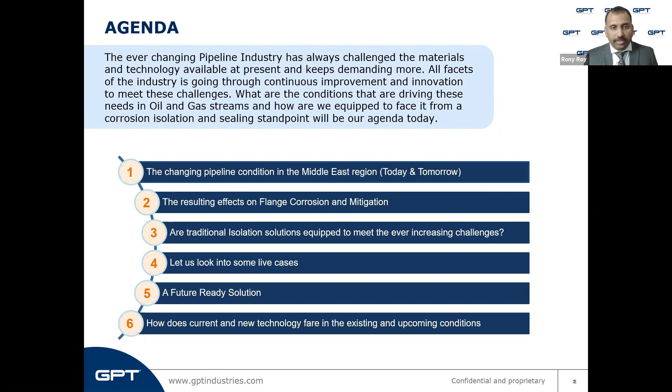Today we are standing at the threshold of a significant energy revolution that is going to change the way we live, travel, conduct business, and manufacture.

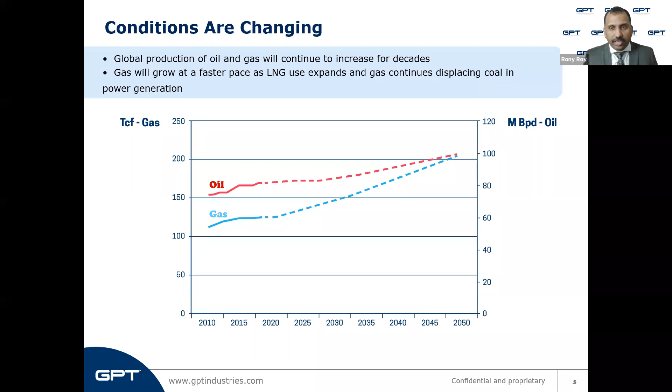Yet we know that man's dependence on hydrocarbons is not going away anywhere soon. In fact, peak oil is still a couple of decades away, and gas continues to dominate the market as it backs up renewables and provides cleaner energy. Population growth is also driving that demand, and producers are going to have to operate differently to meet it. The easy to extract fields are getting depleted. As an attempt to make supplies meet demands, newer techniques and technologies are required.

Now the conditions are changing because the scenario is becoming more and more demanding for the oil and gas or hydrocarbon industry to rejuvenate old wells and to go deeper than ever before to obtain the oil and gas.

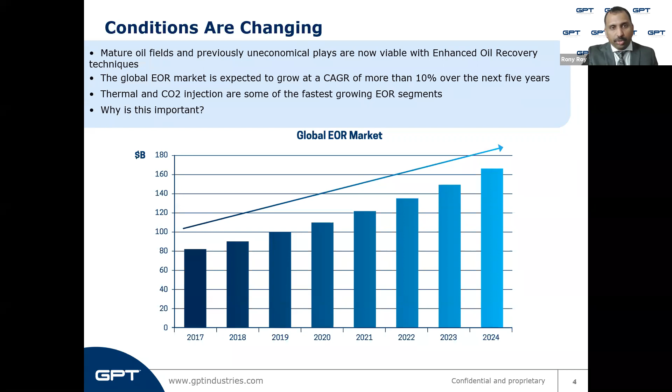Enhanced oil recovery methods have to be put in place now using steam, nitrogen, natural gas, carbon dioxide, thermal injection, and these are all on the rise and will continue for the next couple of decades. This exposes products in the pipeline to temperatures, pressures, and mediums that it has never seen before, and that too in large quantities. High pressure and high temperature wells, and ultra high pressure and high temperature requirements, are on the rise. Suitable materials that can withstand very high temperatures and pressures are required for each and every component in a pipeline.

Further, the conditions are changing in terms of the sour content in the wells. The easily recoverable and sweeter resource wells are getting depleted quickly. The newer enhanced recovery methods and knowledge in exotic metallurgy has helped drill deeper and extract from wells with more sour content. H2S, or hydrogen sulfide, from these sour wells affects detrimentally all the components used in these operations. In pipelines, hydrogen sulfide is a primary contributor to a substance called iron sulfide, which you see as black sedimentary buildup inside the pipelines when you open it up after certain years for maintenance. This buildup is intrusive in nature, and it disturbs the flow of media and even facilitates corrosion.

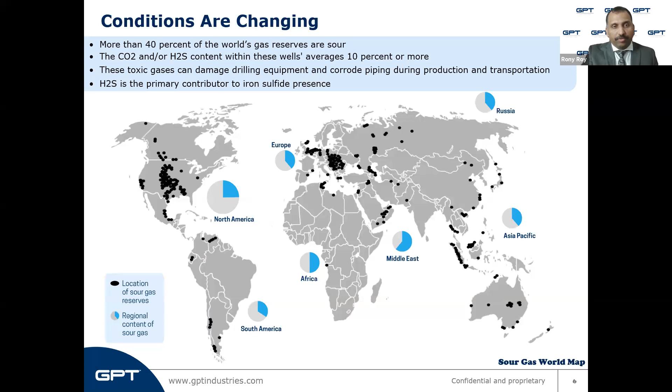Even greenhouse effect reduction requirements are in place, with government entities taking a much more proactive role to bring emissions down. Talking about onshore and offshore refineries, distribution lines in the upstream, midstream, and downstream processes of the hydrocarbon industry, every sector is aiming to reduce the carbon footprint and emissions.

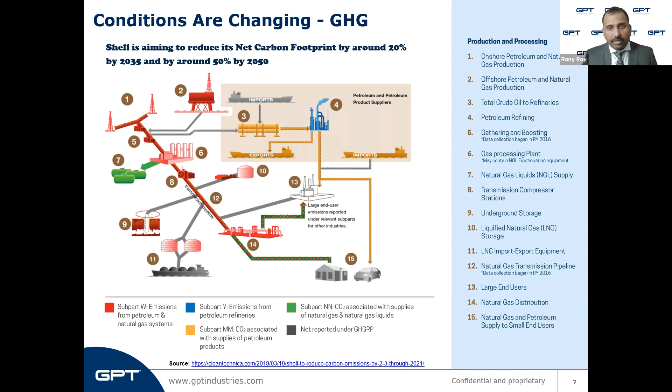Shell is aiming to reduce its carbon footprint by 20% by 2035, that's 15 years down the lane, where everyone is concerned about reducing emissions. Even here in the Middle East, local players and end users are adopting serious measures to reduce their carbon footprint and be less taxing on the environment, which is good news for everyone, and manufacturers like us are also required to be aligned with it for a joint effort toward a good cause.

ADNOC recently mentioned that it aims to reduce its carbon footprint by 10% by 2023 and 25% by 2030. To achieve this, ADNOC is constructing new carbon capture, utilization, and storage facilities alongside the existing Al Reyadah one.

Saudi Arabia's state oil giant, Saudi Aramco, has agreed to reduce the carbon intensity of its business as part of the Oil and Gas Climate Initiative, which includes Shell, BP, and ExxonMobil as an industry-funded alliance. They have pledged to reduce the carbon intensity of their fossil fuel production to between 20 and 21 kilograms of carbon dioxide per barrel of crude by 2025.

To meet these stringent emission norms and targets, the sealing needs to be tighter, with little to no chance for permeation.

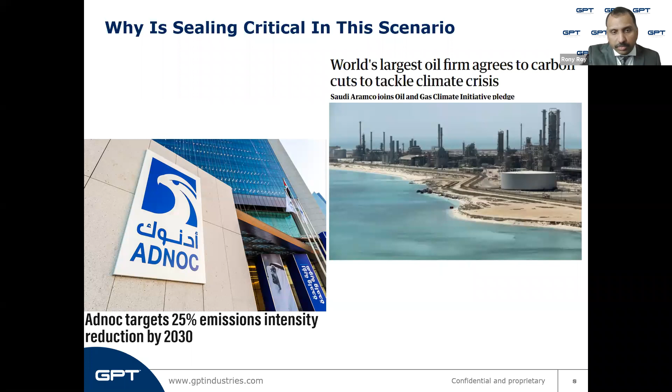So how do these conditions influence sealing? Such changing conditions require a significant improvement in flange joint sealing, and it is the need of the hour, as only a correct seal or gasket can keep the stuff that should remain within the pipeline within the system. The ideal seal should be able to remove the chances of contaminating the surrounding environment with a tighter seal.

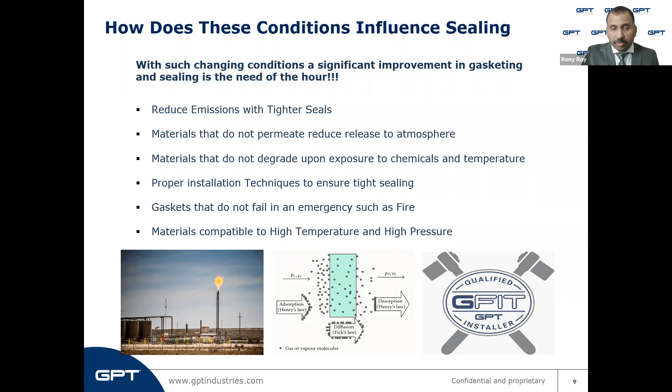The materials themselves being more compliant to the conditions will help reduce toxic emissions and improve performance. A proactive method of preventing seal failure by increasing the skills of personnel through training, and doing the installation correctly in the first place, is also required. Better and safer seal design can eliminate risk during emergencies such as fire. All these factors are contributing to the requirement of bringing down emissions and making seals more effective in the future.

With all this insight in developing the ultimate seal for the future, we will see how seals and different conditions such as environmental and metallurgical factors can affect the flanges where they need to seal.

Flange face corrosion is a subject in its own right, as many companies have invested millions of dollars to ensure the flange joint conditions perform well to meet production consistency and quality, along with increasing its life and reliability over the years. Corrosion preventive measures such as regular maintenance, using flange isolation kits, and using flange joint covering bands are some of the methods adopted for achieving corrosion protection against flange joints.

Today we'll look into how flange isolation kits contribute to this requirement.

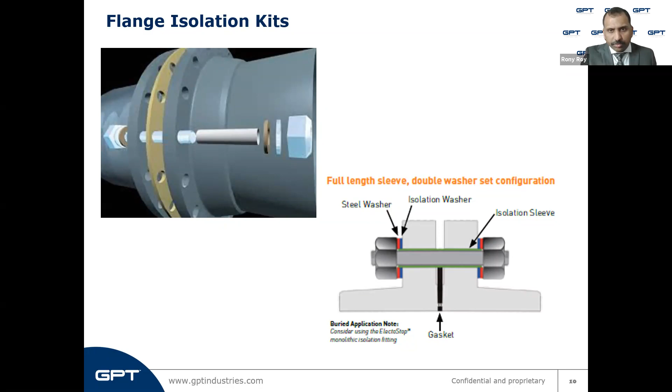The first and foremost is galvanic corrosion. When 2 dissimilar metals of different electrical potential are coupled with each other by a metallic path, and in the presence of an electrolytic or conductive media, it will lead to galvanic corrosion.

Flange isolation kits remove the metal contact between such flanges at the flange faces with an isolation gasket, at the studs with an isolating sleeve, and at the nuts with isolating washers, as you saw in the previous slide. By isolating the metal-to-metal contact, flange isolation kits eliminate any chance of galvanic corrosion, preventing flange reduction or material reduction in the flange joints.

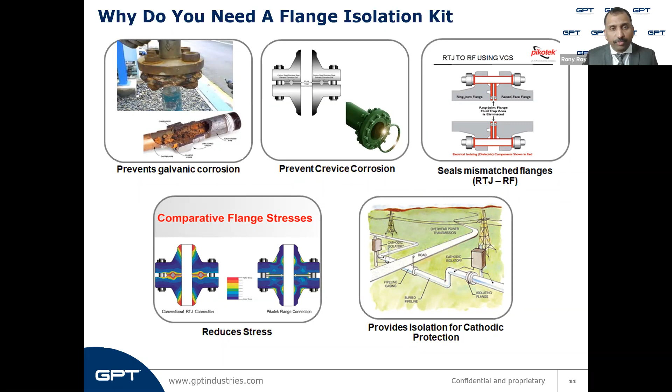And the final one is isolation joints being used in CP systems, or cathodic protection systems. This enables isolation between sections that are CP protected and unprotected. It also helps increase the cathodic protection efficiency by eliminating the risk of stray currents and surrounding electrical influence. Also, it is used in long pipelines at sections of above ground and underground transfer points.

So we have seen what a flange isolation gasket kit does. Now, where do we stand in terms of this industry? Let us see where the current technology stands and why innovation is long overdue in this field.

In the beginning of the last century, phenolics was the material of choice, which was then taken over by fiberglass or glass reinforced epoxy that came into the scenario through development in material science in 1942.

Over the years, since its introduction in the isolation industry, the glass reinforced epoxy, or gaskets made from glass reinforced epoxy, has seen various improvements and incremental development to compensate for its shortcomings and the heavier demands of the hydrocarbon industry.

Various improvements in the design of the isolation gasket made by GRE were ushered in to make it withstand high pressure, provide fire safety, and make it more chemically compatible.

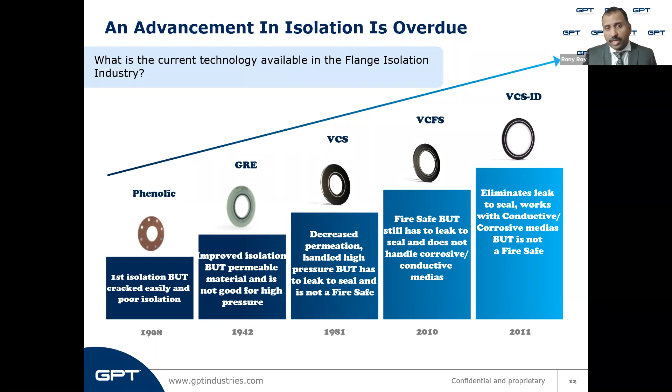Yet we see a common theme here. The glass reinforced epoxy has its own demerits, and gaskets laminated with them have isolated flanges but have struggled to keep up in other areas. Permeation, susceptibility to melting in a fire, chemical incompatibility - all these issues have plagued the plastic laminate, or the glass reinforced epoxy laminate, that goes on top of isolation gaskets.

Now, what is the challenge with the current technology? We have seen designs where the isolation gasket is made from a stainless steel or metal core, which is laminated by GRE, or glass reinforced epoxy, on both sides of the gasket.

As a global manufacturer, GPT always interacts with corrosion engineers, integrity engineers, reliability engineers, and material engineers at our end user companies throughout the world. And we perform voice of the customer interviews regularly. In such discussions, we come to know the trending changes and new needs of the industry, and we design our products accordingly.

Now, the VCS gasket has got a 316L SS core metal, and it has got glass reinforced epoxy laminates as part of the retainers, laminated on top of it and on both sides. And it has got a groove where a Teflon seal gasket, which is pressure energized or spring energized, is laid inboard.

Now, when pressure is introduced into the media in the line, the media can permeate through the GRE material, the glass reinforced epoxy material, and can reach the Teflon seals. The Teflon seals are designed in such a way that they compensate for this shortcoming, and they positively get energized, further pressing against the flange face and providing a positive sealing effect.

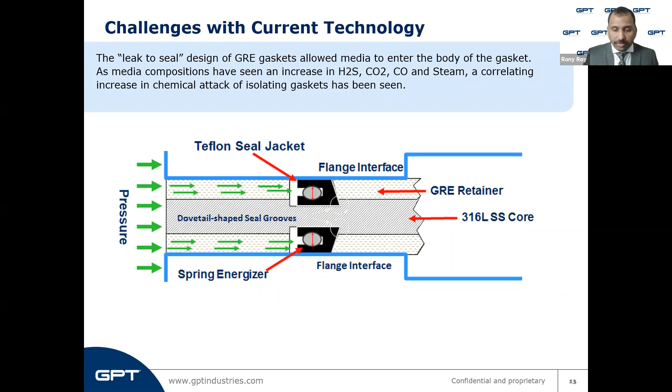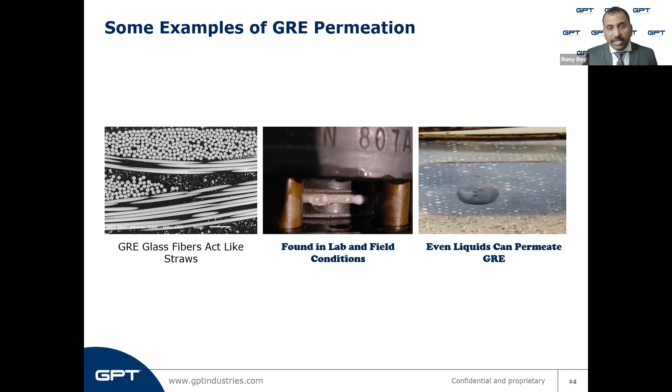And you can see another picture on the right hand side - it is a gasket that was taken out of operation after 15 years in a highly viscous hydrocarbon line, and yet you can see the hydrocarbon or media had permeated through the GRE body itself.

N-butane was the most prevalent chemical in the pipeline makeup. The thermoset glass reinforced epoxy receives a not-rated certificate for this chemical at 234°F. Greater than 20% swelling will occur with a greater than 50% loss in tensile strength. This confirms why the G11 delaminated.

G11 is a type of GRE grade used for manufacturing these gaskets. You can see the glass reinforced epoxy G11 had delaminated from the stainless steel core, which led to the blowout of this gasket.

A chemical treatment was also added to the media stream on occasions, and this treatment contained ethyl benzene, which has a non-rated rating at 70°F with the epoxy. Upon evaluation, we could see that much of the gasket was simply glass fiber with no epoxy left in the matrix.

As this happened with the media in the line, it started to migrate and permeate through the gasket material made of GRE. Once the epoxy was gone, the gasket lost its strength, and the 1636 psi line pressure pushed the seal into the weakened glass structure and created a blowout.

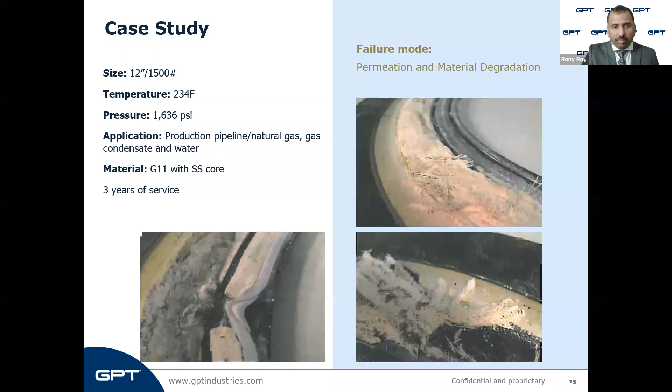Another scenario in the conditions that are changing in modern times is the high pressure and high temperature requirements. Conditions are demanded for higher steam applications, and temperature has increased a lot over the years. The temperature requirements for well conditions are much higher than they were in the past. So GRE does not have the high temperature capability, and homogeneous GRE does not have high pressure capability.

Metal cored GRE should not be used in applications that are over API 10K, and fire safe glass reinforced epoxy, or GRE, should not be used in applications over API 5K.

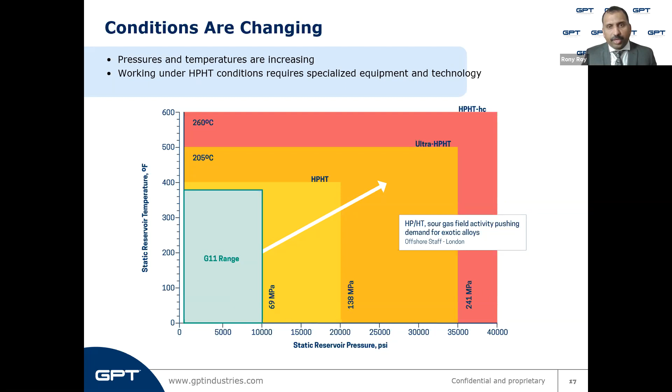As we just saw, G10 covers very little of the potential temperatures and pressures that can be seen in today's pipelines. G11, another grade of GRE, has a better temperature rating, with a temperature limit of 200°C, but it still covers only a small portion of this graph.

Moving on, we can see a case study of how GRE gaskets fail in high temperatures. This is a live example to emphasize the risk of plastics being exposed to temperatures that they will not be comfortable with.

This was a gas application at a Christmas tree. It was high pressure at 7,000 psi at over 330 degrees Fahrenheit. The gaskets were G10 with a stainless steel core. These gaskets were exposed to temperatures exceeding the rated value of G10 material.

The G10 glass reinforced epoxy near the bore on both sides of the gasket was very dry and brittle, consistent with the epoxy binder being driven out of the glass fabric by the high pressure. This leaves the G10 very weak and brittle and can allow the seals to creep, especially at these temperatures and pressures.

The drying of the glass mesh, that is the absence of epoxy, became much less severe away from the bore. That tells us the inner portions of the gasket experienced higher temperatures than the outer portions. The upper limit of G10 is 302 degrees Fahrenheit, or 150 degrees Celsius, so this was not the correct choice for this application, eventually leading to a blowout.

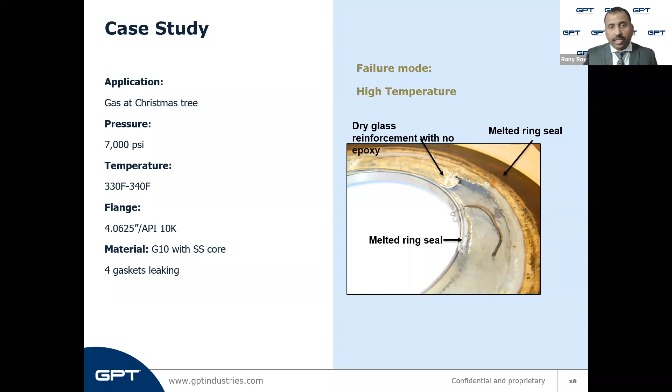Another application where GRE has a shortcoming is when it is introduced to steam. This was an actual gasket which was put into service and taken out of service after 34 weeks. This speaks volumes about the incompatibility of GRE in steam applications.

Water combined with CO2 will produce carbonic acid, and the epoxy in the GRE is incompatible with carbonic acid. But the carbonic acid wasn't actually the issue - GRE is simply not compatible with steam.

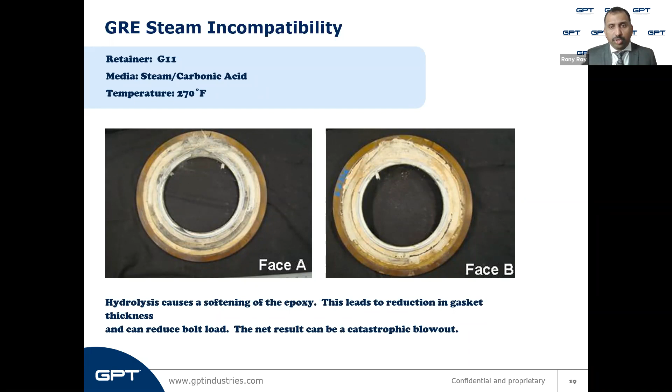This can be seen from the two images. G11 is rated at 200 degrees Celsius, so the 270 degrees Fahrenheit should not have been a factor, but the softening of the gasket due to the steam introduction and the volume loss led to a blowout, which is a real danger.

A case study to prove this point is here. At GPT, we are lucky because we have a fairly large engineering staff who are able to review these failed isolation products and create a forensic report about it.

We are also fortunate that we are part of the Garlock family of companies, and Garlock has a tremendous number of analytics equipment in multiple laboratories. We are able to ascertain material component makeups, thermal degradation values, maximum temperature exposure, chemical attack, tensile values, change in tensile values, and many other things that we can evaluate in our laboratories.

We even have a functional test laboratory that can replicate field conditions to make sure that our gaskets or seals are going to work in the conditions that are out there. In this case, we have a 16-inch 600 class glass reinforced epoxy metal coat isolation gasket, like the VCS that we had discussed before.

The pressure was approximately 1440 psi and the temperature was 220 degrees Fahrenheit, or 105 degrees Celsius. The media was hydrocarbons with steam, and the application was a slug catcher.

Analysis shows that the epoxy in the glass reinforced epoxy became hydrolyzed by the steam. Hydrolysis, as known from the Greek term, hydro means water and lysis means to unbind. The epoxy chains were broken down under pressure and literally got driven out of the glass matrix. This dramatically reduced the strength of the product and ultimately led to leakage or blowout.

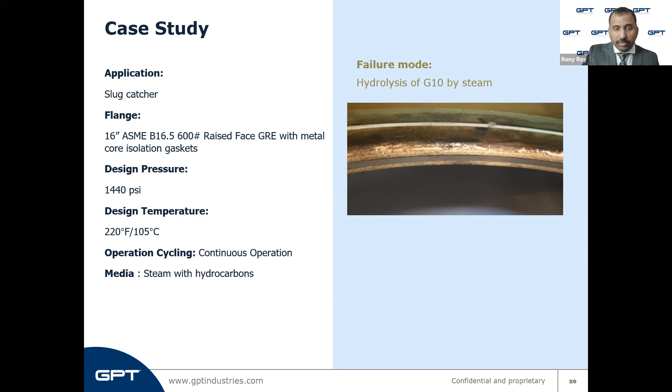Another shortcoming of GRE is its chemical incompatibility when it comes in combination with sour content. If the media entering the gasket is not compatible with the GRE laminates, there can be many types of failure. This is a study of glass reinforced epoxy's incompatibility to the chemicals in the media flowing through the pipeline, which can lead to chemical attack.

In this case, G10 and G11 grade gaskets were exposed to sweet gas and sour gas for a period of 2 weeks. You can see from the bubbles forming on the gasket face that it appeared as though the G10 and G11 were being attacked by the sour gas.

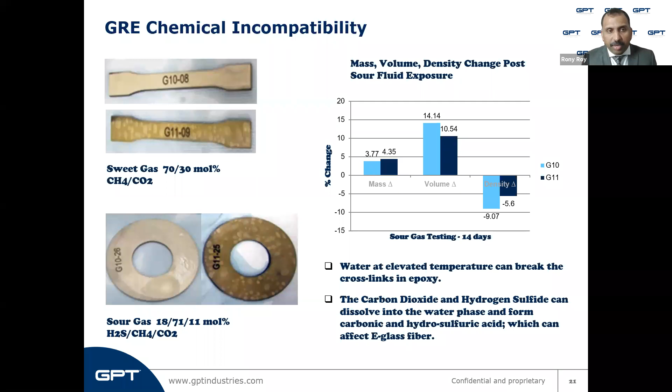We performed mass change, volume change, and density tests on the G10 and G11 samples, and indeed they were both attacked and had significant changes in these three parameters by the sour gas that was introduced into the media while testing.

This is a live case of how GRE will fail under conditions of chemical incompatibility in sour media. The temperature was 124 degrees Celsius, the pressure was 1180 psi, and it was a ring type joint flange. The gaskets here were only in service for 90 days.

To really get a good understanding of exactly what happened to this gasket, let's have a look at a cutaway view of the gasket in the pictures at the bottom. The cause of failure was a combination of attack by sour gas and the effects of steam hydrolysis.

You can see from the images that the inside of the gaskets were devoid of epoxy, extending all the way through approximately 66% of the gasket.

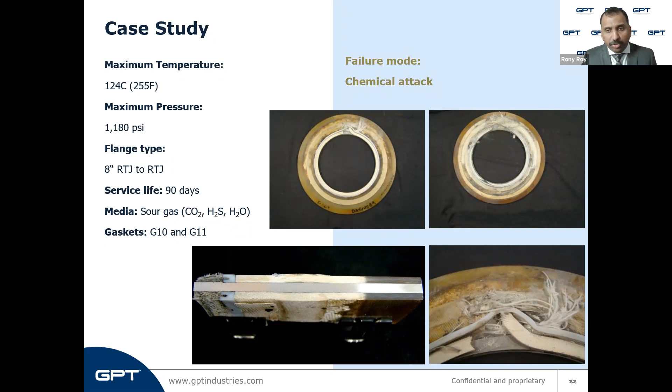The high temperature water broke down the epoxy by breaking the crosslinks, and the hydrogen sulfide, as we know from other sour gas testing, accelerated the breakdown in the epoxy by reducing the gasket's density and increasing the gasket's mass. Additionally, the hydrogen sulfide can dissolve into the water, and the carbon dioxide can as well, creating hydrosulfuric acid and carbonic acid, which can break down the glass fibers. So this domino effect led to a failure in just 3 months.

GRE is not fire safe. You can see how a GRE looks after it is subjected to burning in a fire.

We have equipment to conduct road shows, and we have done some of these road shows at our customers' facilities in Abu Dhabi, Saudi Arabia, and India, in our quest to increase awareness about the lack of fire safety and the issues lines will face if they lack fire safety in non-fire-safe GRE isolation gaskets. Fire tests such as API 6FB, live roadshows, and history all prove this point.

Now, which customer wouldn't want a fire safe product to increase their safety rating and records? Yet most of our sales testify that customers still buy non-fire-safe GRE gaskets, as the fire safe gaskets are very expensive for many.

So when you subject a standard flange isolation gasket kit to fire, it tends to have, as you can see here, some failures.

The gasket itself, with its plastic laminates, fails after a certain degree Celsius. G11 would fail after 200 degrees Celsius, G10 would fail after 150 degrees Celsius, and this leads to a fluid leak path. The other failure components are the isolation sleeve, also made from G10 or G11, and the isolation washers, also made from G10 or G11.

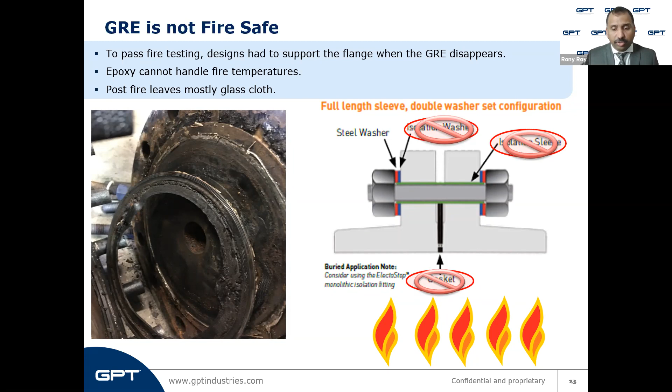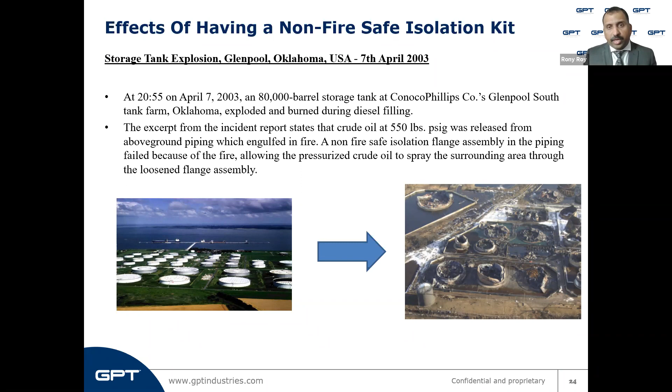One of the examples is the storage tank explosion in Glenpool, Oklahoma, USA, where the incident report stated that crude oil at 550 psi was released from above ground piping, which was engulfed in fire. A non-fire safe isolation flange assembly in the piping failed because of the fire, allowing the pressurized crude oil to spray the surrounding area through the loosened flange assembly. This is an example of how things can severely go wrong and cost millions of dollars, many times higher than the slight premium needed for a fire safe isolation gasket.

Another big challenge with GRE laminated isolation gaskets is their thickness. The metal core GRE isolation gaskets, due to limitations of the then available technology, were made thicker than conventional gaskets. A metal core isolation gasket is 6.6 mm thick compared to 3.25 mm thickness of a regular gasket. This leads to the need for a different approach of installation, and the flanges need to be spread much more than usual.

When we are sometimes told that the gasket was damaged during installation and that the installation was done exactly as the manufacturer recommended, when we ask to have the gaskets returned, we often see large indentations in the metal caused by installers beating the gasket into the flange. Now, that is not a manufacturer recommendation.

So the common 6.6 mm thick isolation gaskets will be a difficulty to install in pipelines that are designed for gaskets that are 3.25 mm thick. Flanges that are not perfectly parallel and are not well aligned will present an even greater issue.

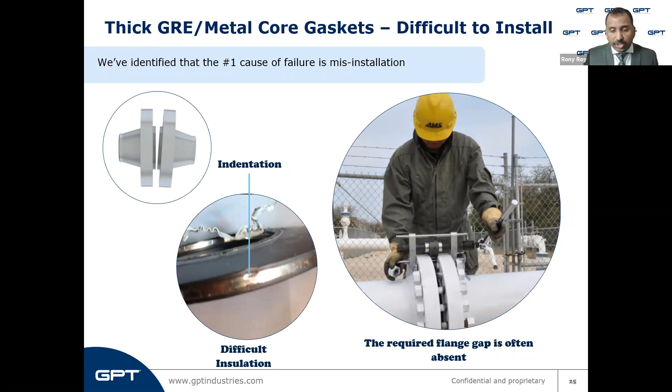A case study about how this can go wrong is here. This is a live example of bad installation. Three isolation gaskets were installed on the upstream side of a venturi meter. Not enough flange gap was created and the isolation gaskets were damaged during installation. Most high pressure isolation gaskets have retainers that are at least 6.6 mm thick. They typically have a seal that protrudes approximately 5 mm more, so a flange gap of at least 9 mm is necessary so as not to damage the seal or gasket.

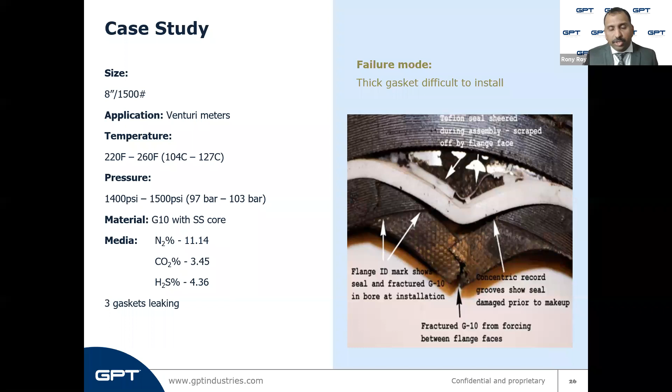Interestingly, with this case, the downstream gaskets appear to have been installed first, and all 3 functioned properly. But when the upstream gaskets were installed, the space was very tight and limited, and that led to the tearing of the GRE as well as the popping out of the PTFE's additional seals.

Now, what could be the ideal isolation product? We sent out invitations to corrosion engineers, integrity engineers, reliability engineers, and material engineers of companies and users around the world and performed voice of the customer research. Based on the feedback we got, we zeroed down to 5 essential points: fire safety at an economical price point, better chemical and thermal properties, thinner gasket for easy installation, high pressure capability, and low emissions. These were the 5 points we kept in mind when developing a gasket that is future ready.

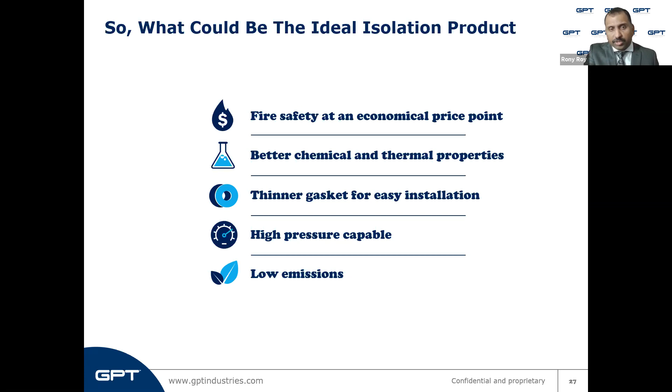This is the new product that GPT has introduced into the market about a year and a half ago, and it is called the Evolution. For the last 80 years, isolation gaskets have been a plastic laminate of some sort. As we have just seen, there are many potential failure modes with these plastic products. GPT has spent over 5 years researching the failure modes of GRE products and now proudly introduces this first isolation gasket that has eliminated any plastic or non-metal on the retainer of an isolation gasket.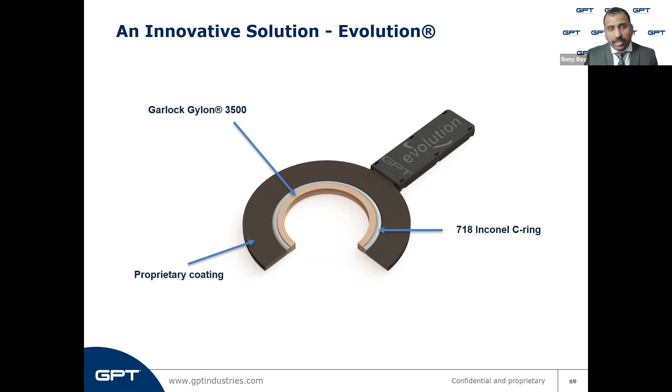Moving on, I was talking about having a tight sealing to make the new sealing options more compliant and better performing for emission requirements, bringing down the leakage rate. Now, this new innovative design has several key attributes, and one of them is that it is extremely tight sealing.

If we look at the sealability of Evolution versus a G10 stainless steel isolating gasket of the previous technology, in an EN 13555 leakage test, Evolution has a leak rate of about 1 times 10 to the negative 8 helium per second. That's about 1 cc of helium leaked over a 3-year period. Whereas the G10 laminated stainless steel isolating gaskets leak about 1 cc of helium every 3 hours. Many conventional gaskets out there, such as the spiral ones, perform much lower than the G10 laminated SS isolating gaskets. You can imagine how much tighter the Evolution is.

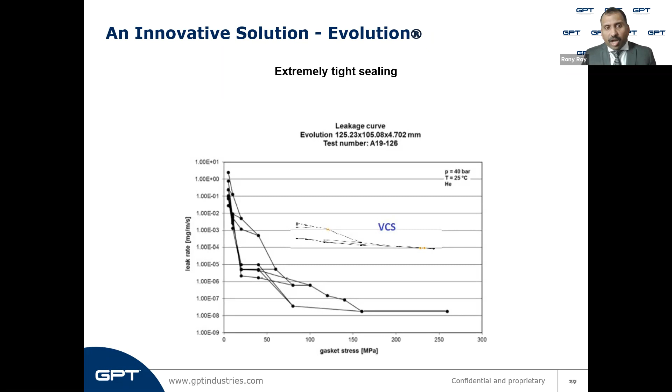The other requirement analyzed during our changing conditions slides was the temperature requirement of the materials. GRE G10 and G11, as we saw, has a temperature rating of 150 degrees Celsius. G10 is 150 degrees Celsius maximum, and G11 is 200 degrees Celsius maximum. Evolution is rated to 500 degrees Fahrenheit, or 260 degrees Celsius, and has shown very little degradation even at temperatures higher than that. The test was run at ambient temperature when you compare these two graphs against a G10 material. G10 becomes a molten mess by the time it reaches the temperature limits of Evolution.

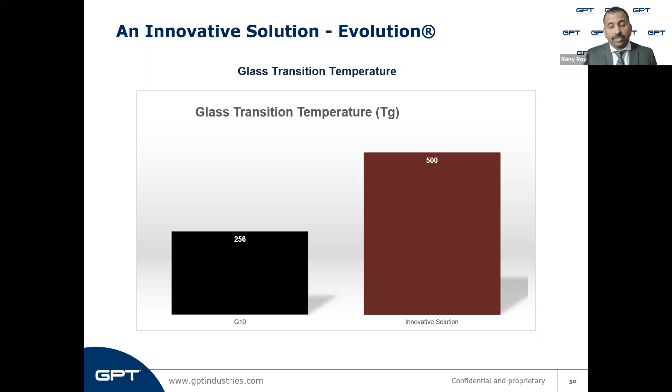You can see the G11 and the G10 compared to Evolution based on the temperature ratings, as well as another important factor, the dielectric factor. Since these are isolation gaskets, the dielectric capacity is important as it prevents galvanic corrosion. Even the dielectric value of Evolution is significantly higher than the homogeneous G10 and G10 with the stainless steel core. The same holds true for G11, which is similar to G10 in its dielectric values, rated at 800 volts per mil.

Evolution, on the other hand, with its new coating, has a minimum dielectric value according to ASTM D149 dielectric testing requirements of 1400 volts per mil, and that is the minimum rating. It has gone up to 1800 volts per mil in some of our tests.

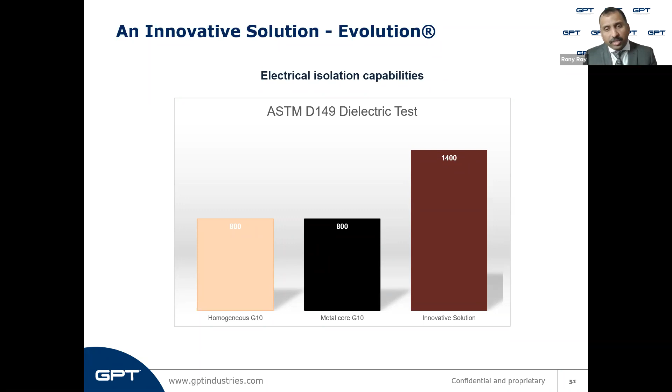The other key factor is that G10 and G11 will absorb moisture during a hydro test because they are permeating in nature, as we have seen in previous slides. This significantly reduces the resistance values after a hydro test. I have seen test results ranging from 3 megaohms to 7 megaohms, and many companies limit the spec value at 10 megaohms minimum. This can be a problem when using a G10 or G11 based gasket after a hydro test. Evolution, since it is a metal coat, a complete metal gasket with no plastic laminates, doesn't permeate, and even after hydro test, the typical dielectric or resistance readings are in the gigaohms range.

Evolution is also much thinner than most high pressure isolating gaskets. The recommended flange gap for a typical flange should be 1.5 times the gasket thickness, which leads to 9 mm spreading of the flanges to make sure you can install a 6.6 mm metal core gasket.

If you are looking at a regular gasket thickness, that is way too high than the normal requirements. Now, as we already mentioned, the Evolution gasket has no plastic retainers on it, so it is much thinner in its construction. It has got a 3.125 mm thickness, which is in line with the industry's regular practices or regular thickness of gaskets, so you don't have to spread the flanges much more than what is generally required.

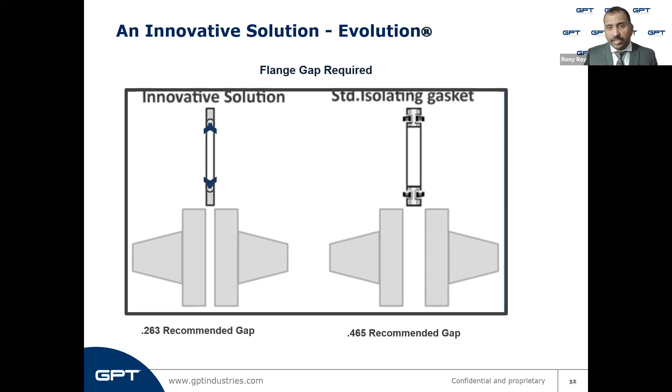We also did sour testing for the new solution along with a new gasket type, along with the G10 and G11 gaskets or materials. When we immersed it in sour gas media, the mass, volume, and density changed significantly. This is a strong indicator that the product is being chemically attacked. The bottom line is that epoxy simply is not compatible with hydrogen sulfide. The gaskets were visibly affected by the hydrogen sulfide, indicating further that they were chemically reduced.

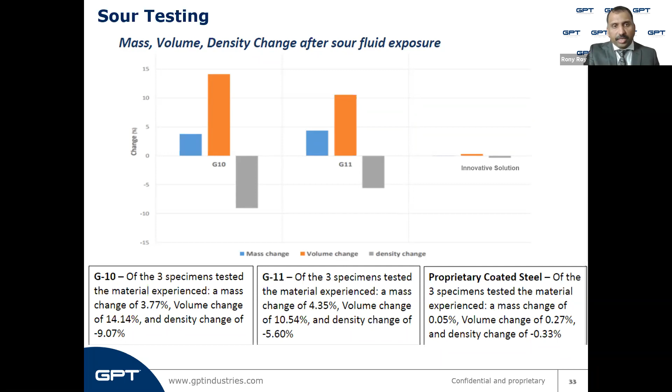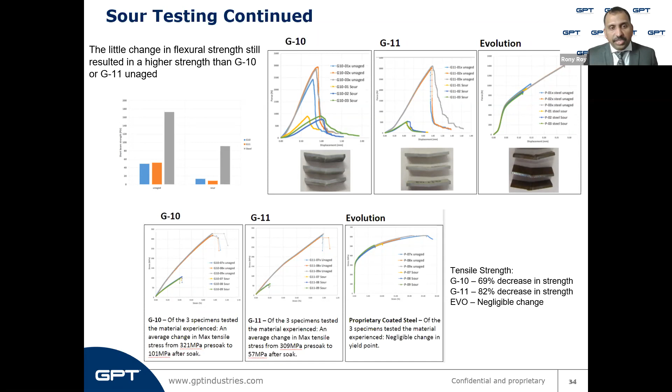Now, if you look at this slide, there are many graphs trying to tell the story about how G10 and G11 don't fare well in sour testing conditions. But in a nutshell, if you want to know how it affects the three solutions, the tensile strength readings are given in terms of percentile decrease at the bottom right hand corner of this slide. You can see that G10 decreased in strength about 69%, G11 decreased about 82%. But if you compare Evolution with it, it had very negligible change. There was nothing to suggest that Evolution would not be able to keep sealing even after the introduction of such media into the line.

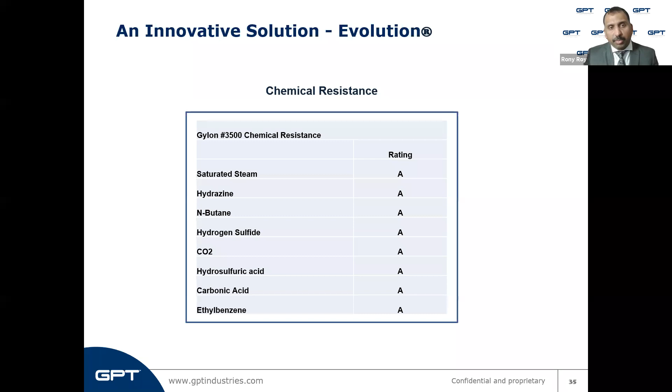Another thing we did to make sure Evolution is chemically resistant to many of the conditions that GRE, or glass reinforced epoxy, G10 and G11 laminates are not, is we compared the chemical resistance to many other media conditions. As you can see, we introduced saturated steam, hydrazine, N-butane, hydrogen sulfide, carbon dioxide, hydrosulfuric acid, carbonic acid, ethyl benzene, and it gets a very good rating. It's a rating A, meaning it is good to be used against these chemicals and will not be chemically attacked. So we made sure the new solution is chemically compatible where GRE normally fails.

We have also tested Evolution in high pressure tests. In this example, we tested in ambient temperature for 60 minutes of hydro testing. The worst performance we saw was 28,000 psi when we tested 4 samples, and that wasn't because Evolution had leaked, but because the flanges were lifting off. Even at 32,000 psi and 36,000 psi, all the leakages were because flanges started lifting off at such high pressures. We need to do much higher testing with higher rated flanges to see what would be the actual pressure conditions Evolution can hold without a blowout.

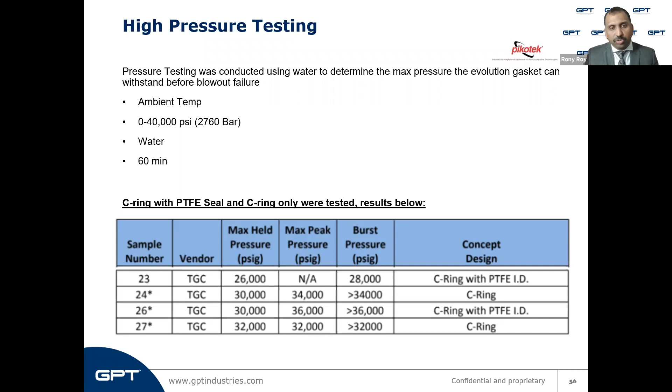G11 or G10 with a metallic core will leak or blow out at between 15,000 to 20,000 psi when subjected to pressure testing.

We have another important thing to talk about: the coating, since people will be unfamiliar with the coated isolation gasket. When we started evaluating coatings for potential use on this isolating gasket, we looked at several tough coatings available in the industry, like the 3M coatings and PTFE coatings. So many coatings are available out there. The 3M coatings proved to be one of the toughest in the industry. As you can see in this graph, the ASTM 2197 scratch resistance test was one of the tests that all the coatings we evaluated were subjected to.

In this test, we run a 2 kilogram load tungsten stylus, which keeps moving up and down until it scratches the coating away and hits the base metal. This stylus is connected to a voltage supply, so the moment it touches the bare metal, there is a resistance breakdown. The 3M coatings, which are the best among all other coatings available in the industry, had 99 revolutions of the stylus moving up and down before they broke down.

When we first developed this coating, you can see the readings in red on this graph chart. We put it as old Evolution. We tested it against these other coatings, and it took about 250 revolutions before it failed. But you can see another graph in brown color — that was the second edition of this coating, which we improved further with more additives to make it stronger and more resistant to site conditions. You can see that new combination is much better than the old combination, which was already better than all the coatings available in the market. It is 10 times stronger than the older coating.

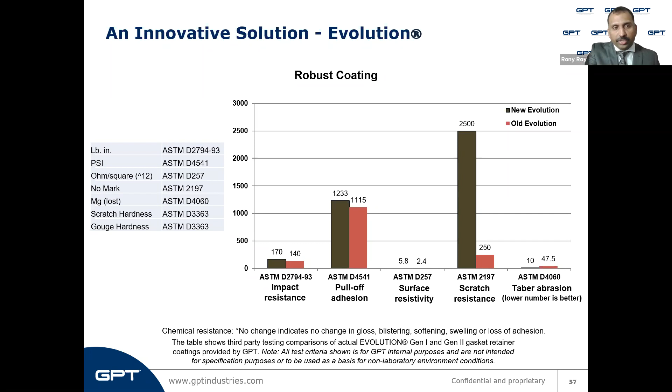So in short, this coating used on this gasket is very, very scratch resistant and far more durable than any other coating available in the market right now.

Now let's recap all the cases we initially saw where the GRE isolation, glass reinforced epoxy isolation products, had failed, from the perspective as if we had installed Evolution in each of those same applications. In the first case, Evolution does not allow permeation and will resist hydrolysis and will survive in that application. Also, Evolution is chemically compatible with N-butane and ethyl benzene and would not have been chemically attacked.

In the second case, Evolution has a much higher operating temperature rating than either G10 or G11, and would have worked well in an application requiring exposure to higher temperature.

The third case involves steam. Evolution resists hydrolysis by steam and would have survived that application too. The next case involves exposure to sour gas, and since Evolution is chemically compatible with the levels of sour gas present in this application, it would have performed well even in this application.

Since Evolution is fire safe and tested to API 6FB 3rd edition fire test requirements, it would prevent a catastrophe or emergency in the event of an external fire by containing the flammable media within the line. In the last case, Evolution is less than half the thickness of most plastic isolation gaskets out there and would have been much easier to install.

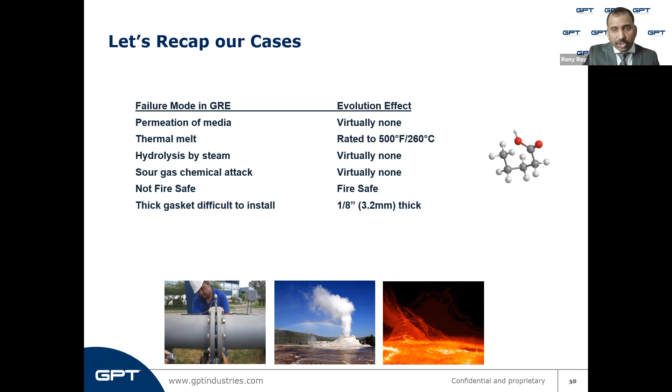Once again, if we revisit the 5 major requirements of an ideal isolation gasket, as put down by the VOCs we gathered from the industry, we can see that Evolution is specifically designed to meet all these needs. It provides fire safety at an economical price point, has much better chemical and thermal properties compared to a GRE, or glass reinforced epoxy, lined gasket, is thinner to facilitate easier installation, has high pressure capability, and has very low emissions.

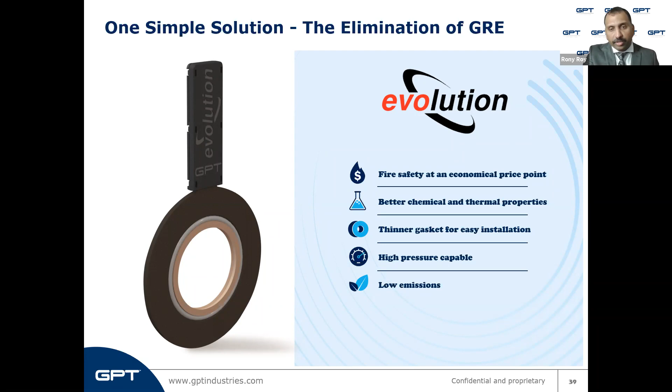And this one product eliminates the need for homogeneous GRE gaskets, steel reinforced GRE gaskets, fire safe GRE gaskets, and PTFE ID seal GRE gaskets. It is truly one simple solution available to take care of all the requirements that the industry poses now and in the future. So exactly what are the specs on this new product?

It is a 316L stainless steel retainer that has been fully encapsulated in a proprietary coating. It also has a primary sealing element made of Garlock's Gylon 3500, which is a re-engineered, better PTFE design, and has tremendously reduced creep and cold flow characteristics when compared to a regular PTFE.

There is a secondary seal made of Inconel 718, which has great recovery characteristics and is also the seal that is going to prevent any leakage during a fire. The Inconel seal is also fully encapsulated in this coating.

The color of the retainer is dark brown with a tan primary seal. The coating is approximately 0.010 inch thick, and the gasket is currently rated to minus 50 degrees Celsius as the minimum temperature and 260 degrees Celsius as the maximum temperature.

We are doing tests for much lower temperatures to see how this gasket can be used for cryogenic LNG applications. The sizes available right now are 1/2 inch to 36 inch, although engineering is working on larger size offerings, and we should be able to offer 48 inches before too long.

The pressure offerings are 150 class to 2500 class for ANSI class flanges, and API 6A flanges from 2K to 5K, although engineering is right now working to offer API 10K and API 15K applications also.